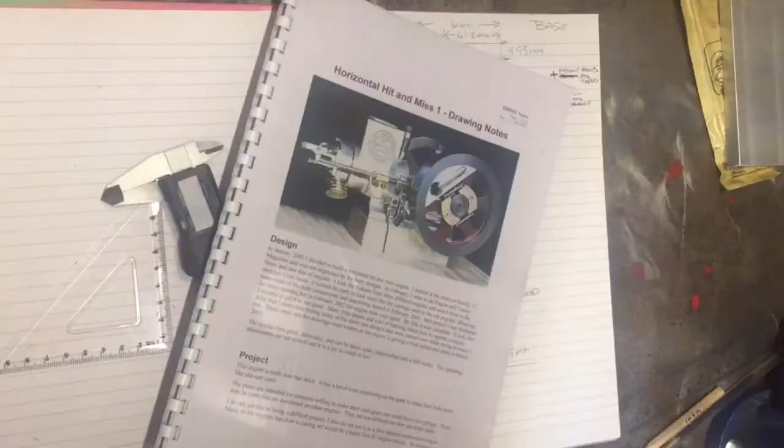But what I've been doing this morning is, let me change your angle so you can see better. A friend of mine kindly printed off the instructions for how to make my hit and miss engine, but like I said last time, there's a few little things I want to change.

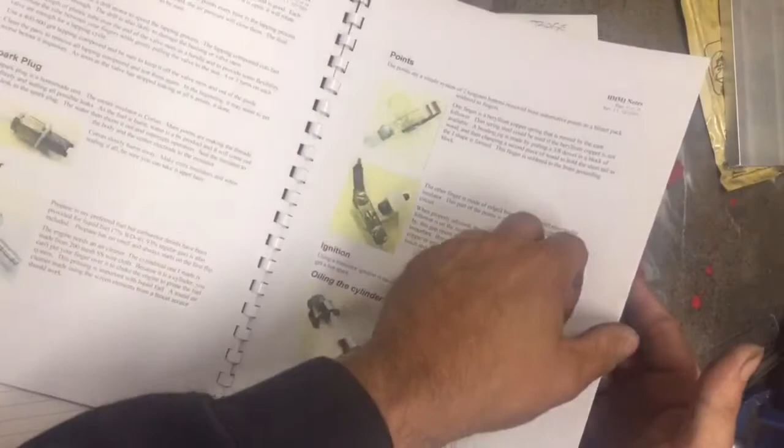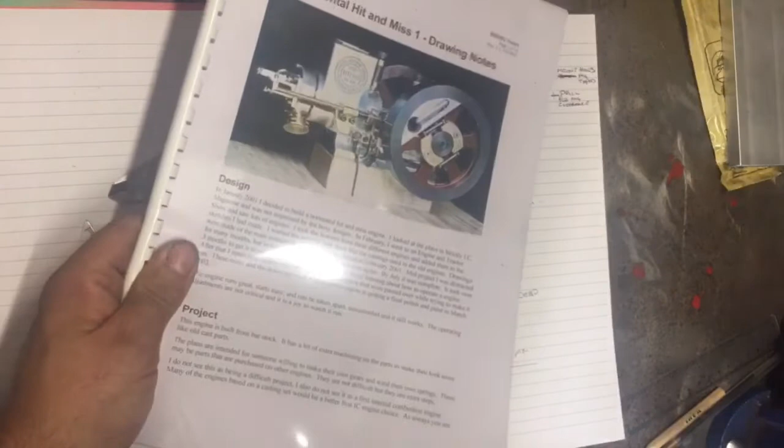You can see that - the first thing we need to make, not that bit, is the base, which is there. But it's all in Imperial, and my head doesn't work in Imperial, and it's hard. So rather than converting every time I go to make something, I thought I'd just buy a book.

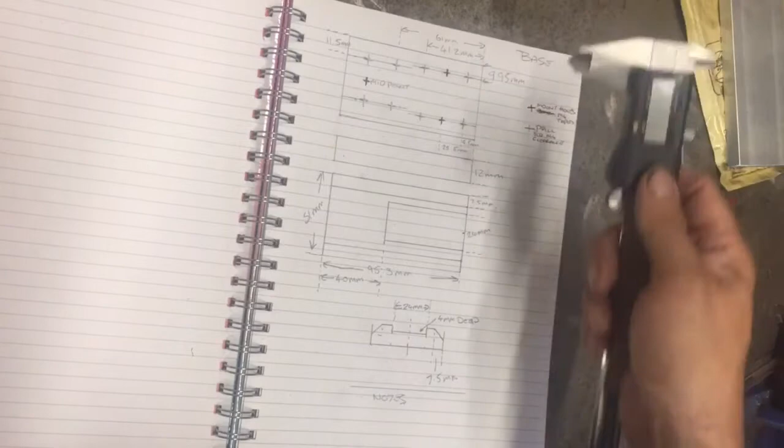Obviously I draw out the plans the same size as they should be, so this is the exact size, and convert it into millimetres so I can refer to this rather than having to convert it each time, because otherwise I'd look at that bit, convert it, look at the next. It's just easier to have it all in one place.

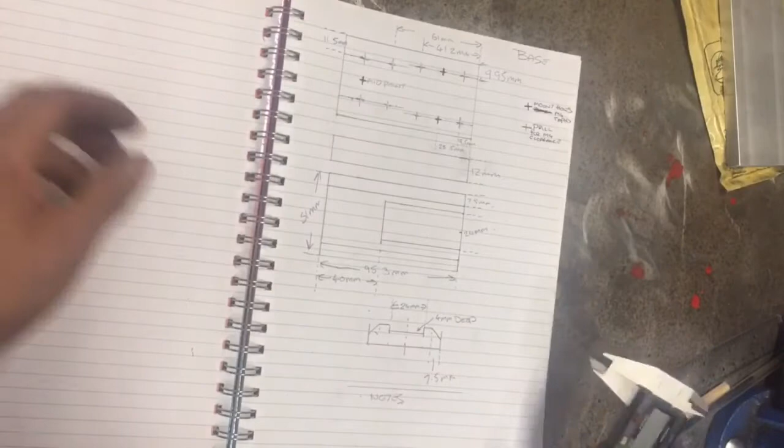Also, if I convert all of the base to start with, then I won't be tempted to do other stuff. I need to do the base, then turn the page, and it's good to refer back - I can put little notes in here, so if anybody else sees it, all the stuff I've done differently is noted.

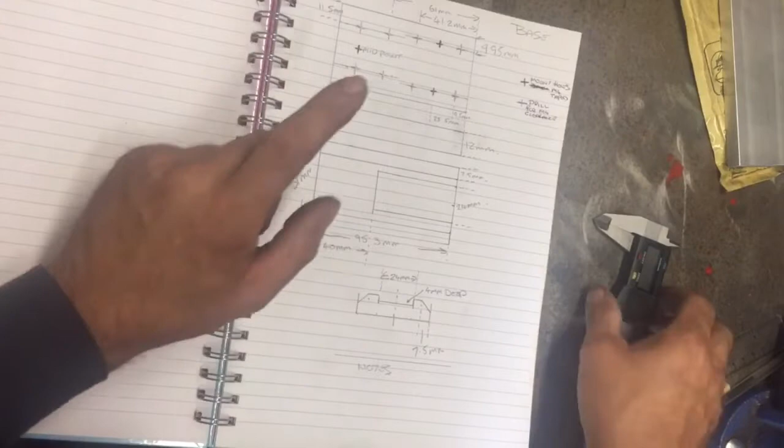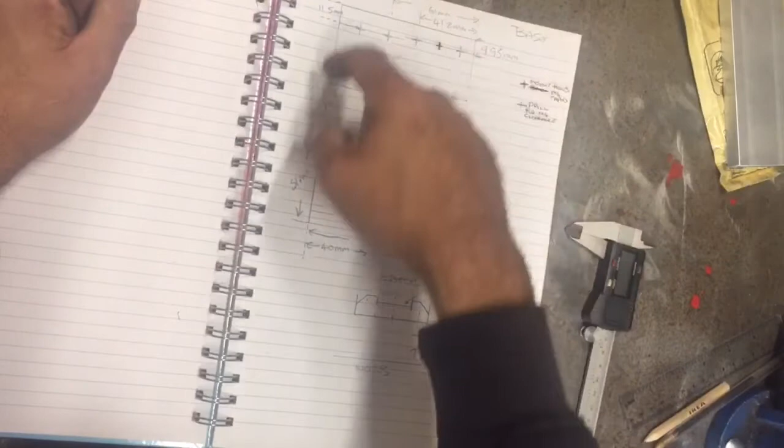The easiest way I've found is to use my calipers. So if we want, say, 0.214 of an inch on my book, I work it out on there and then hit millimetres, and that says 5.43 millimetres. That's how I've been converting it, I don't know what brainwave I had when I came up with that. But basically all the holes are in exactly the same place, just measured in metric instead of imperial, so my head can work it out.

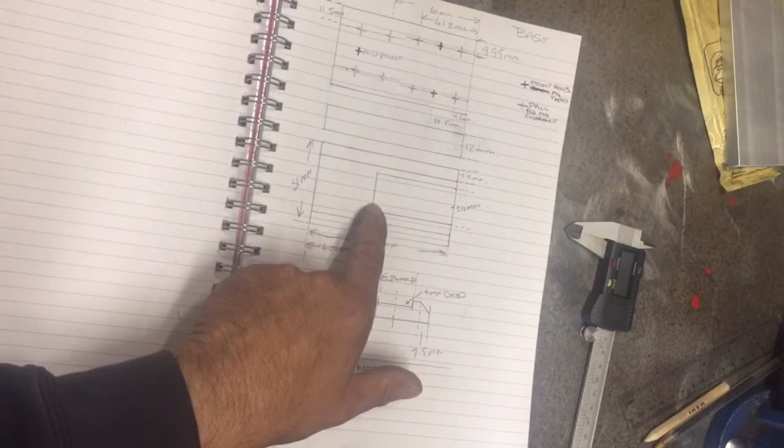One of the other things I wanted to change is where they mill it out here, 4 millimeters deep, to give clearance for where the crank turns around. On the plans they mill a radius all the way through, but I've been looking at the Chinese made ones, and they stop behind the head - I thought if I don't mill it out all the way through and keep this bit solid, it would make that bit more rigid. That's my idea anyway, whether it's right or wrong, but I can always mill it out more afterwards if it doesn't work.

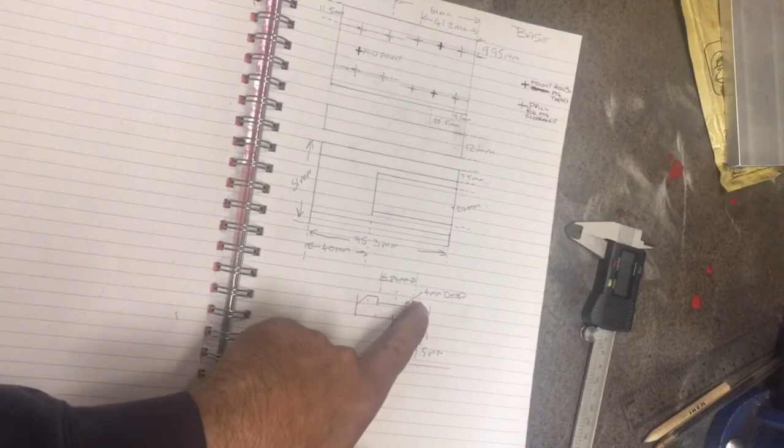I'm probably going to mill mine out square and then put a 45 on the edges just to make it look a little more modern, I suppose. Let's have a look on here, see if that shows you.

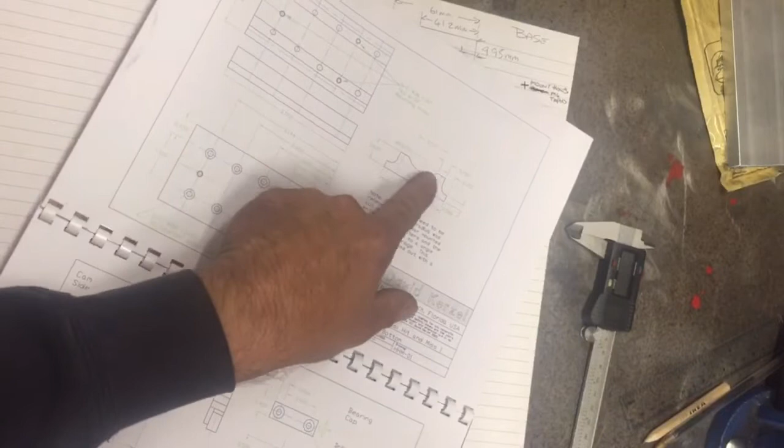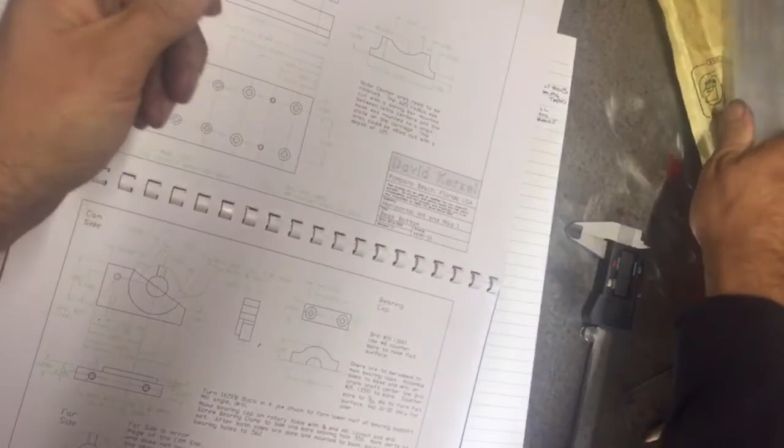What they've done here, can you see that - they put a radius on it and then mill it all the way through, but I'm not going to do that. I'm going to have mine square, not like this, I'm going to have it on a 45 just to give it a bit more strength, because this is the bar I'm going to make it out of, and I just thought that's pretty thin. If you make this a little bit more rigider - is that a word? I don't know - I think that's going to be a better way to go.

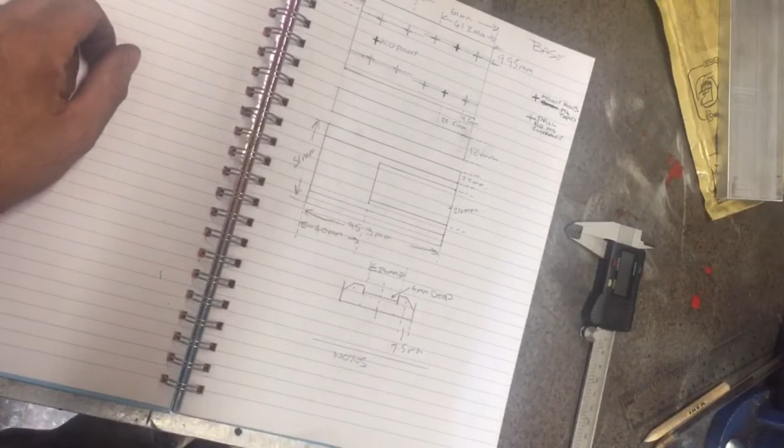So I've been drawing these out this morning, and also thought every time I make a special tool, I'll put it in the notes. I deliberately left the front page undone, because when I find out what inserts I need for my lathe bits, I'll write all the part numbers for bits and bobs, and I might put a list in the back of how much I've spent on parts.

So let's put that away, and I'm going to get on with finishing making the odd bits and bobs, so next time we can start on the base.

Right, so before I make my jaws for my vice, I'll show you a couple of things that I've bought. Let's put my bit of aluminium away.

What did we buy? We bought some of these - I actually bought two lots. They had these Parkside drill bits, about £3, you get 1 mil, 1.5 up to 8 mil. Now I broke some, so I bought one set to replace the broken ones I had, and they were pretty good. So if you hurry up and get down Lidl's this weekend, they might have some left over - the metal ones, the high speed steel ones.

Also, I bought - because when I was making my quill stop, the bar is 16 mil, so I went to all the faff of putting the 4-jaw chuck on my lathe, because I thought I'll whip it out with a boring tool, the 16 mil. But that didn't happen in the end, because I welded that block on, and although I got it square in the 4-jaw chuck, it was just too long.

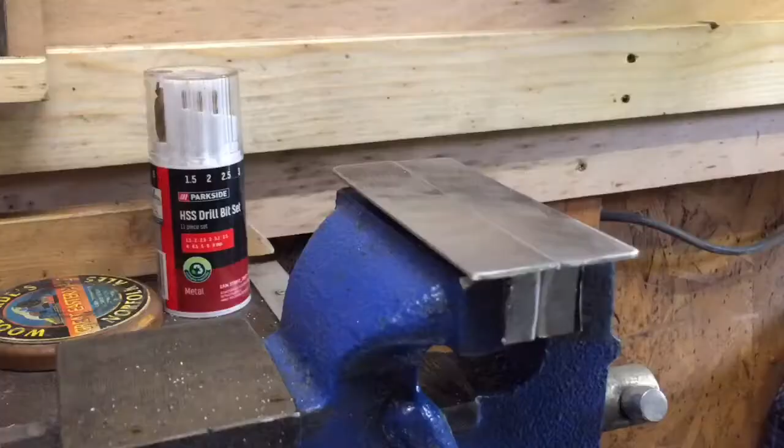Right, so that's them made. Basically all it is, is a bit of angle, and I've just banged the ends over so they fit on there like that, which means they're nice and soft. So I'm getting my new bit of aluminium in there, and because that's smooth, you won't get all that marking. It won't mark the aluminium - well, that's the idea anyway.

I might make another set with some rubber inner tubing. But yeah, that's it, the workshop is ready.

Right, so yeah, look, new glasses. I bet not - I should really be using my old glasses in here rather than my new ones, scratching them up. Yeah, so that's all we're going to do today. The drawings are ready, got some soft jaws on there, so I don't scratch my aluminium, so I can mark my aluminium up.

Quill stop for milling - oh, I don't know yet. I have been offered a milling machine at a very good price, but where do I put it? Because I need something solid to put it, and my boy keeps his motorbike in here still, so I'm going to have to decline that until I'm a bit older and I've got a bit more room.